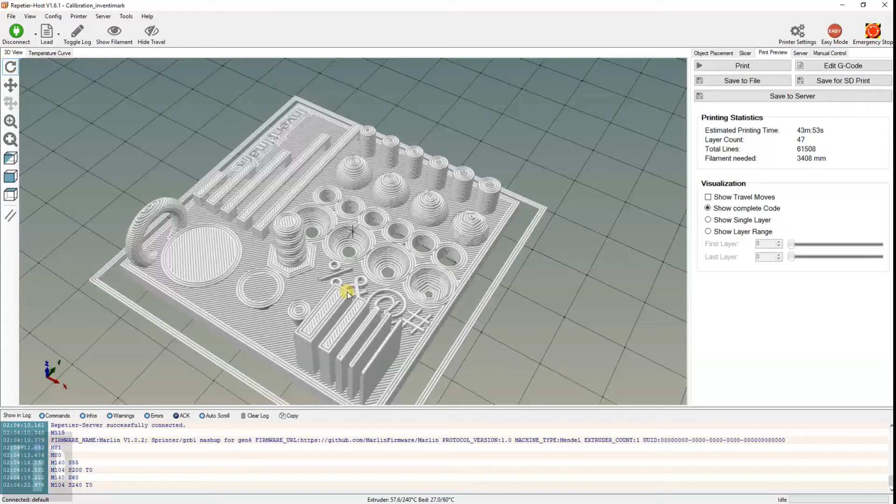Today we're going to be making this. It's a calibration inventimark. And I'll show you how to do it - all these different parts and pieces - and put it together, and you can make your own and do whatever you want with it. But anyway, stay tuned.

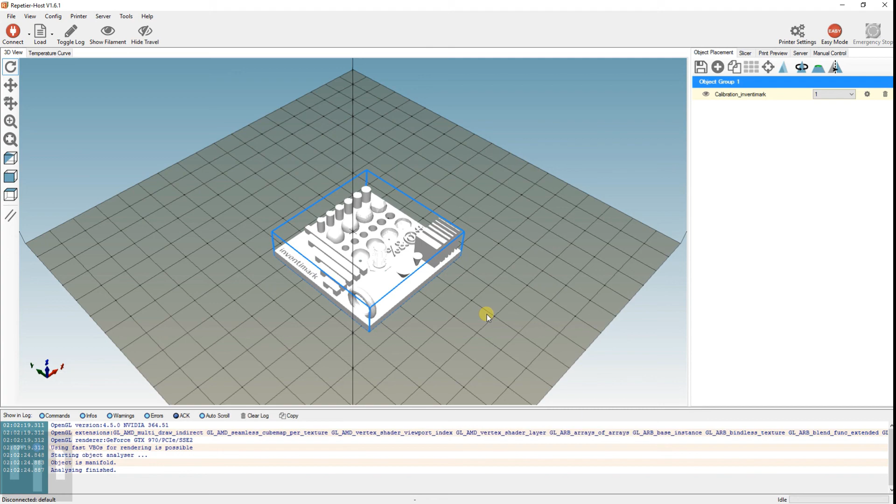Put that there, open up your slicing software, add that in. I always do that whenever I switch from Blender to the software. I move the mouse around and it gets all goofy.

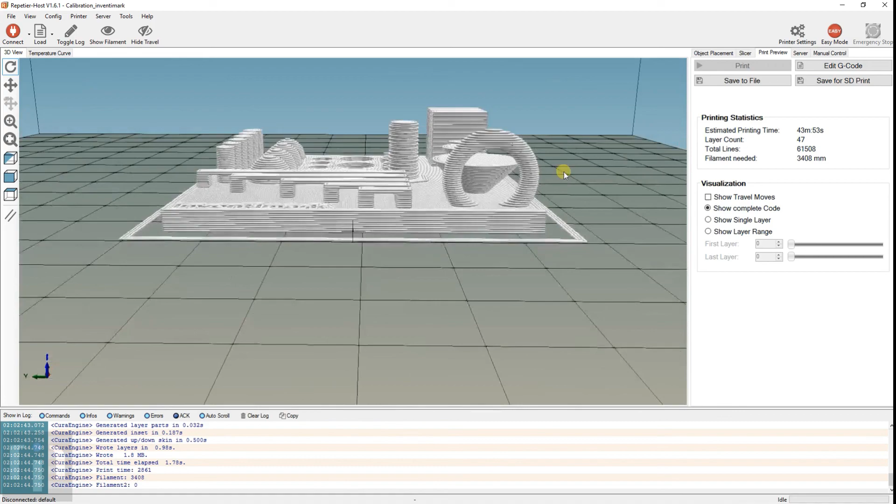I want to use no support to see if we can do those overhangs well. So it looks like it'll take 43 minutes on my settings on my printer. And it looks like it didn't slice this last one that was 0.3, because mine's a 0.4 nozzle. It's smaller than what it can print.

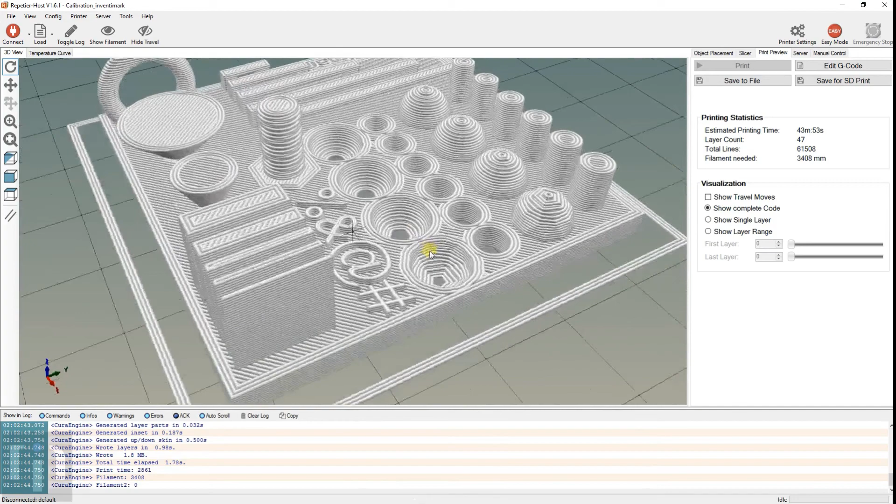Anyway, I'm going to go ahead and print this, and that's pretty much all I had for today's tutorial.